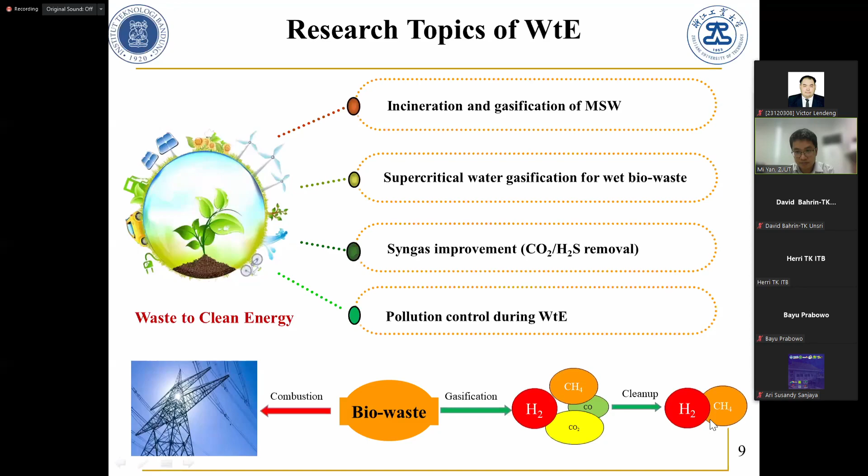So you can understand biomass or bio-waste, by gasification to raw syngas, clean up, get a high value syngas. So we have analyzed how the different materials, temperature, and additives affect the production of syngas. So this is our reactor. We can get 3 phases of products, including the syngas, char, and oil. From these figures, you can find CO2 is very high in the syngas, almost half or 30%. And also H2S and SO2 exist in the syngas.

So this is just combined with the industrial. So we have to capture CO2 from the syngas. In my research group, we have 2 methods. One is DES. Actually, this work is done by an Indonesian student. His name is Haloya Wibawa. So we produce syngas from SWG. Then we use the DES to capture CO2. We analyzed many factors, including the pressure, temperature, the water content. For my general conclusion for DES, the dynamics of absorption is very high, so it's very good for continuous absorption.

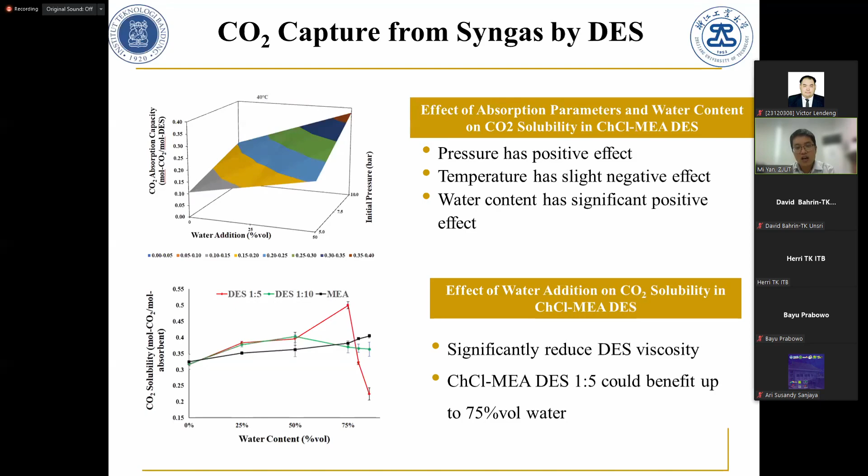And we also use MOF, Metal Organic Framework, to absorb the CO2 from the syngas. We use the CoBDC, and we also do some modification. We research the synthesis parameters, operation parameters, and we get the results, the influence of different factors. And we also do the H2S removal from the syngas. This work is done by an Indonesian student from ITB. His name is Dika. Maybe he has a longer name, but usually I call him Dika. The advantage of the technique is the absorber can work at high temperature for the syngas.

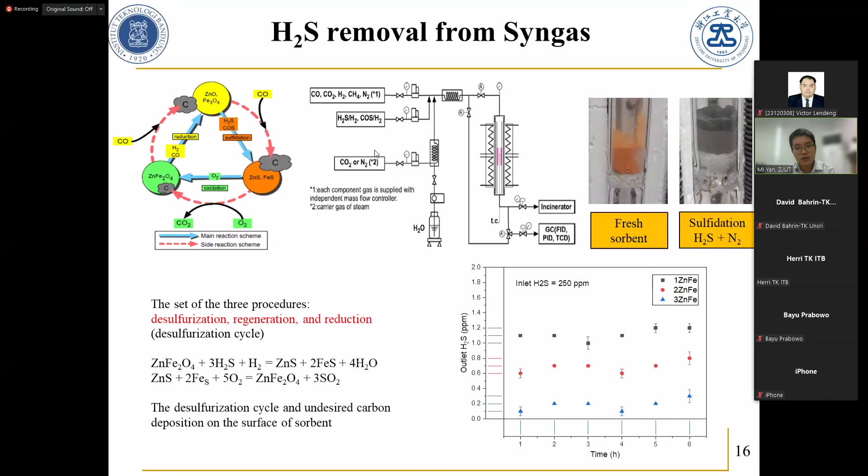As Professor Herri introduced, my lecture will have 7 times, today is the first time. So the title has been introduced, I will not repeat it again. So I just directly go to the content of today. Today I will introduce the 5 parts of my presentation. The first is waste generation, the challenge for living, for the environment, and the second is the waste to energy development and application in China. The third, I think all the public really concern the problem of not in my backyard, so I will share Chinese experience how to handle it. The fourth is the law system or the management for WTE development. The market of WTE not only depends on the technology, it also depends on the laws, standards, regulations. And the last one, I will share my personal idea of what's the challenge of waste to energy sustainable development for the developing countries and in China.

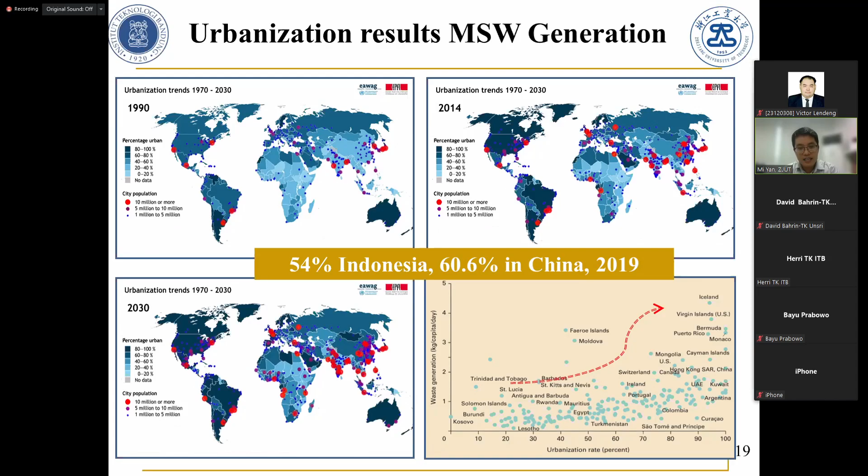So here we can see the society or the economy developed very well since the 1990s. The urbanization increases, right? So 1990s and 2030s, and we will have a sustainable development. But unfortunately, during the urbanization development, the waste generation per person also increased. As I get the information from the web, Indonesia is 54% urbanization and China is 60.6. But I believe we will keep developing in the coming years. So with the development, the municipal solid waste generation for the whole world is roughly 2 or 1.9 billion tons every year, with almost 30% not completely collected. Actually, if you look at the web, you can see it jumping.

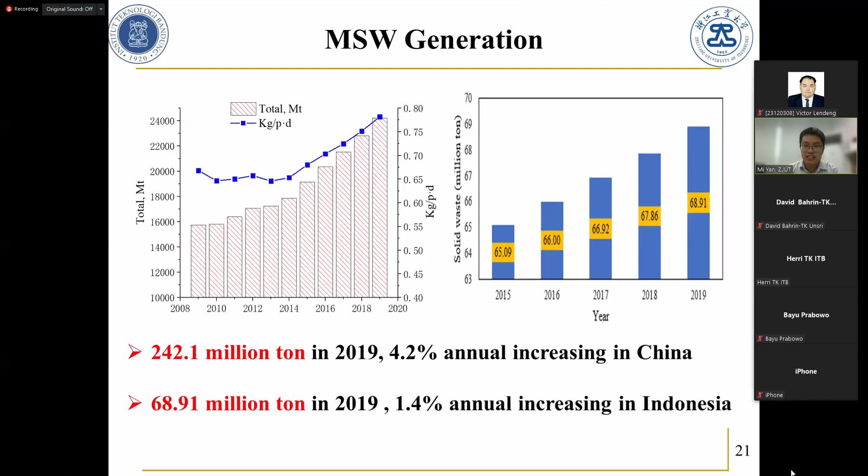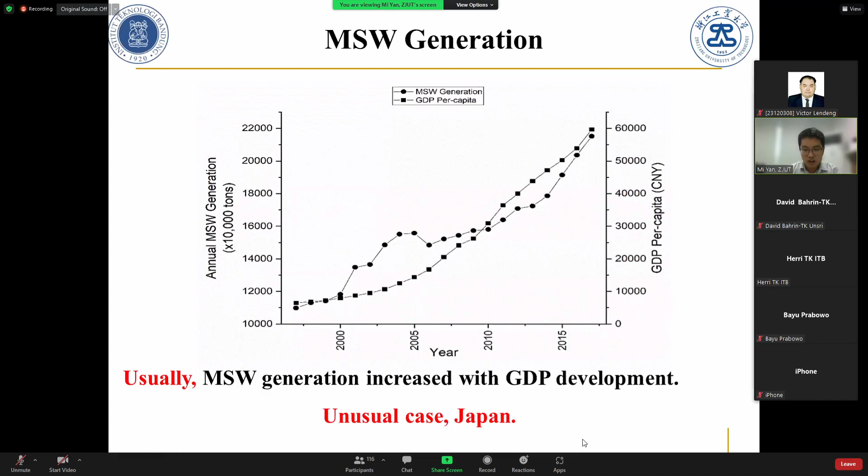For China and Indonesia, we can watch these figures. In both countries, the MSW, municipal solid waste, increases every year. In 2019, China produced 242.1 million tons, and Indonesia generated 68.91 million tons, and it is still increasing every year. So with this amount of MSW we have to think how to dispose of it. Actually, MSW usually increases with GDP development. The only unusual case I found is Japan: recently Japan's economy increased, but MSW decreased. I think we have to learn the Japanese style of how to reduce MSW generation. Usually we have to calculate the waste generation per person every day. Why is this data very important? Because in different countries the population is different, right? So we usually have to calculate this value.

This value also is very important for you to decide the MSW disposal facility. That means, usually, tell me the population of this city, and then I can calculate roughly how much MSW every year, every day. So I can set the capacity of the waste to energy plant. So this is very important.

From here, we can say the economy is good, the waste is more. And of course, China's case is like here. China is 0.78 kilogram per person per day, and Indonesia is 1.38. This is just for the citizens. Of course, in China, the eastern cities will be higher. In Hangzhou, usually we calculate 1 kilogram per person per day, but in Tibet, maybe it's lower.

And municipal solid waste is very complex in its compositions, and it also has rotten and toxic components, and varies with time and location. This is a challenge for disposal, right? So every city, every season, maybe is different. So we should think about how to treat and how to dispose of this changing waste.

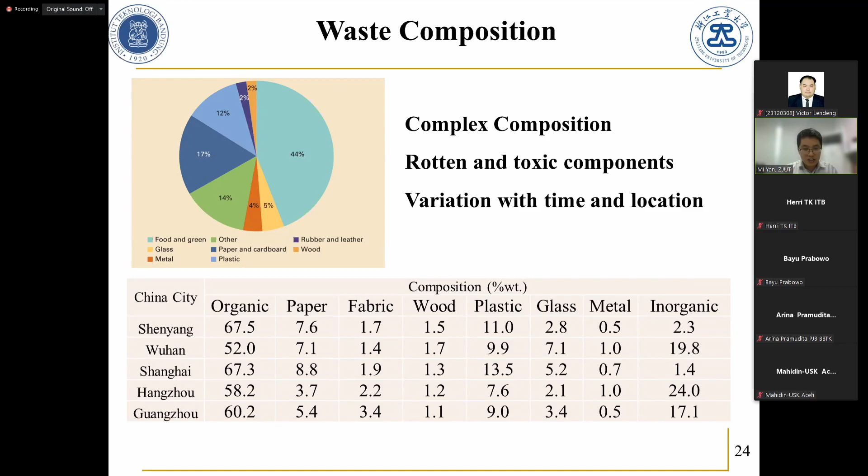Waste, I think everyone doesn't like it, right? It will occupy the land, will pollute the water, also your living environment. But the problem is the waste amount increases every year, and we have not enough land or resources to treat the waste. We cannot dump it, right? So how to deal with it, especially for developing countries?

So there are some definitions I want to explain. First is disposal. Disposal usually means the final disposal, like landfills. And recovery, we have different kinds. We can recover the material, such as gasification or carbonization, recovering the materials for the carbon. And we also can recover the energy. So waste to energy, we produce heat, we produce electricity. That also belongs to recovery.

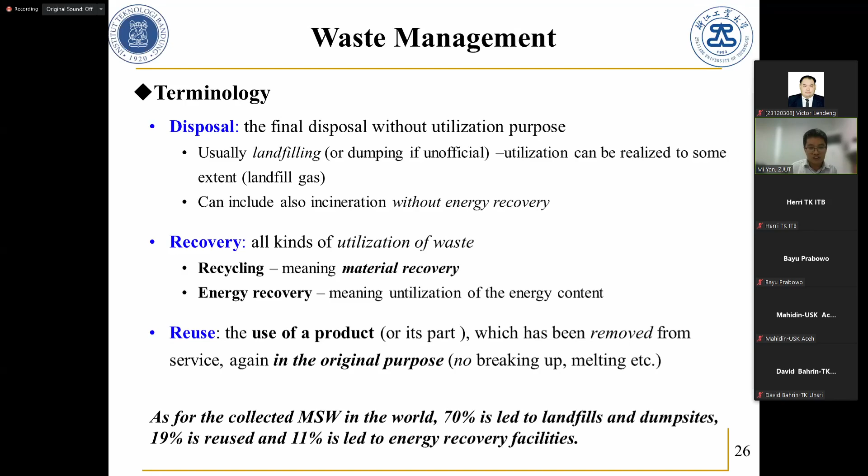The reuse of a product: maybe we just sell second-hand products, right? Usually your books, the senior students' books, can be sold to the freshman students. This is called reuse. So usually we should follow this: first we should try prevention, then reduce, reuse, recycling, then recovery. The last one is disposal, or maybe dumping. So yes, we should follow this.

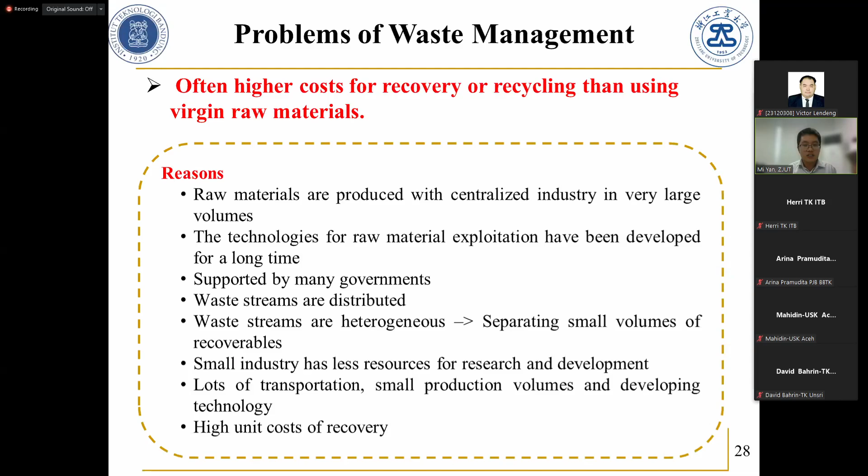But unfortunately, recycling usually has a high cost, even higher than new materials. That's why recycling cannot develop well in many countries, particularly in China. I have another slide about recycling, but maybe you read the news. China already banned the import of recycling waste from developed countries. Before 2016, China imported plastic and paper waste from the USA and Canada, but China banned it, and then this waste went to the Philippines or Southeast Asia. So recycling doesn't mean export or move.

So the main technologies for municipal solid waste disposal include landfill, composting, digestion, and waste to energy. But for municipal solid waste, usually it is landfill and waste to energy. I will explain later, because composting and digestion need land or produce smells. Composting especially is not suitable for the city; in China it's usually in village areas. Waste to energy can quickly reduce the mass and volume, and it can produce electricity.

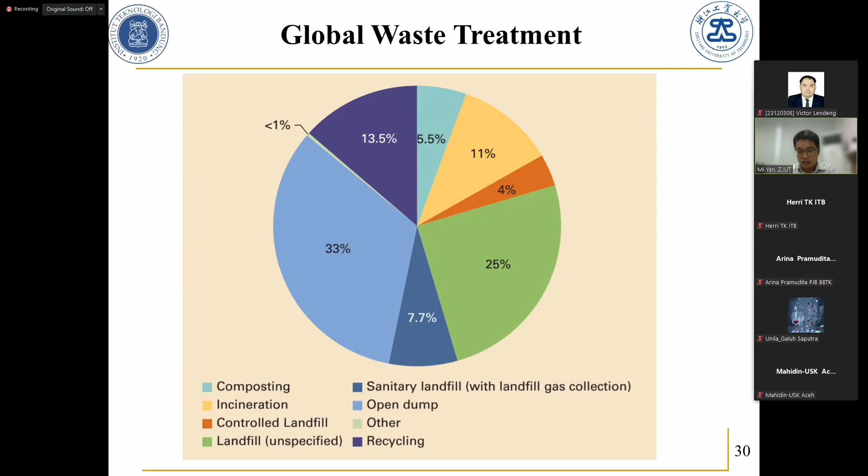For the world, this shows the different methods, including composting, incineration, and landfills. In developed countries, maybe they use composting for backyard waste, such as leaves. So about waste to energy development in China, I think this is the important part for all the participants. You will be interested in this.

As I mentioned, the main 3 disposal methods include composting, incineration, and landfills. But in China, since 2000, waste to energy developed very quickly. At the end of 2019, 99.2% of the MSW was treated, and half was treated by waste to energy. You can see here, the yellow one is WTE, the pink is landfill. So landfill is reduced, WTE increases, and others, mostly composting, are always very small.

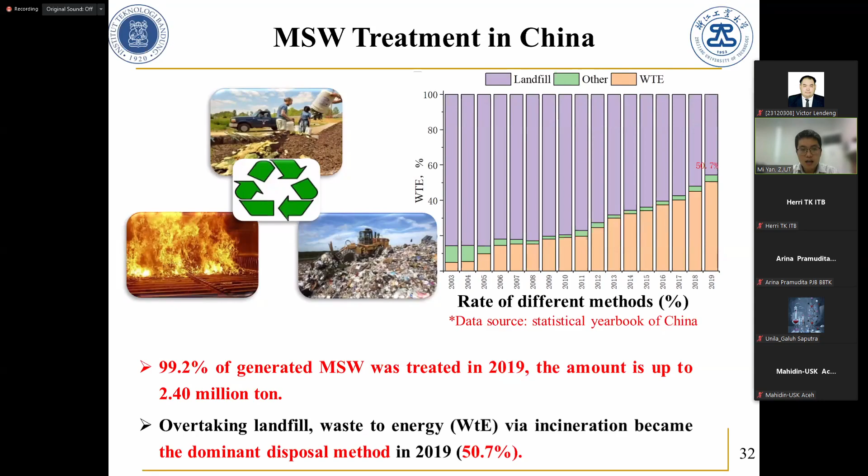Maybe GGH is not very common in developed countries. In China, it's very common. GGH is just how we can avoid the smoke being white. So later I will introduce it.

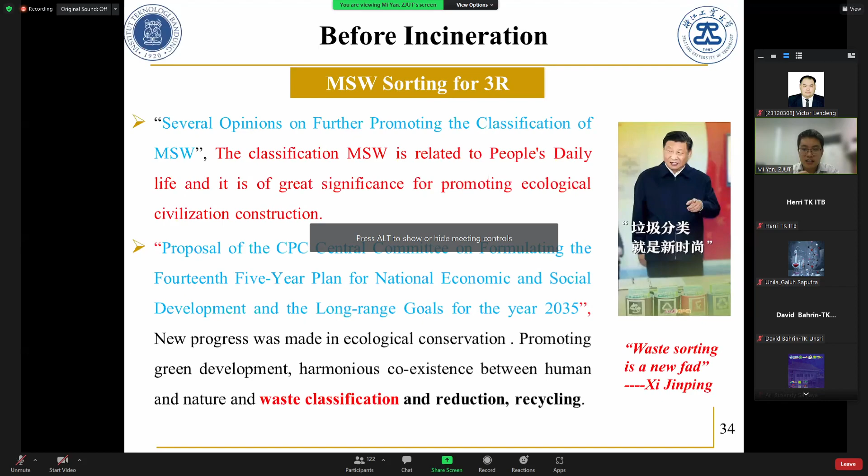Of course, in China, before incineration, we also hope to reduce the waste and recycle it. So MSW sorting activity now is very active. Even President Xi Jinping has given some orders, or talked about this topic many times. So we have some regulations for promoting sorting in China.

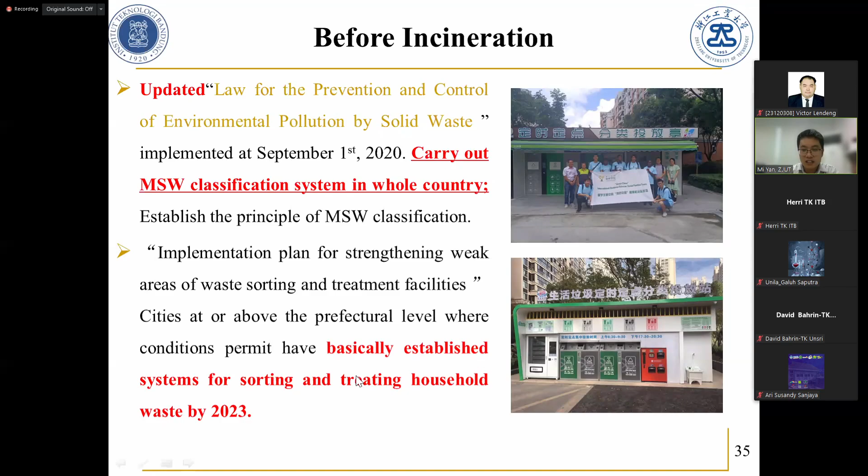So why does China apply waste to energy so quickly? There are some reasons. In my opinion, it can quickly reduce mass and volume. It can completely treat waste with less land occupied, especially in the east part. China has huge populations, so we have to save land, and it produces electricity and construction materials for the city, because the slag, we call it bottom ash, can be used for roads and for buildings.

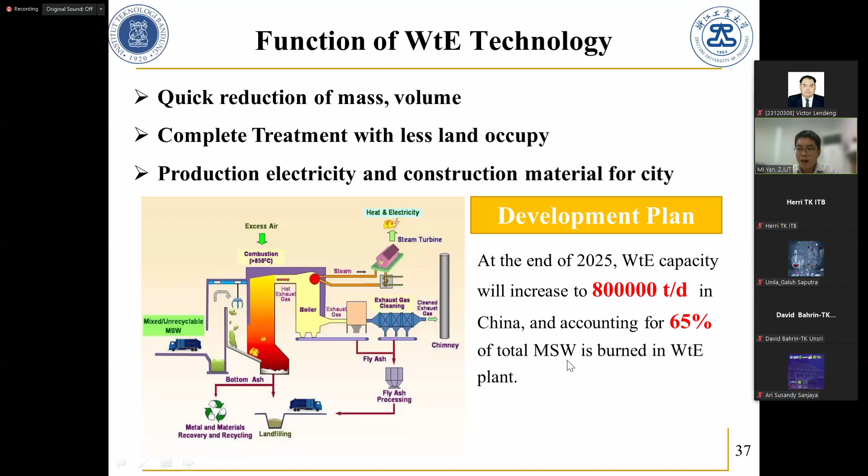Another is that waste to energy also reduces CO2 emissions. I have to explain why waste to energy reduces CO2. Maybe you will think it emits CO2, right, but there are two main reasons. First, if we do not burn waste for energy, it will go to landfill. If it goes to landfill, it will emit methane, and the effect of 1 mole of CH4 is 24 times that of 1 mole of CO2. So first, we can reduce methane emission from the landfill.

The second is, if we do not burn the waste for electricity, we have to burn fossil fuel, such as coal, right? So we can reduce the methane emission from the landfill, and we can reduce coal consumption or coal combustion. So we call it the green carbon of waste to energy.

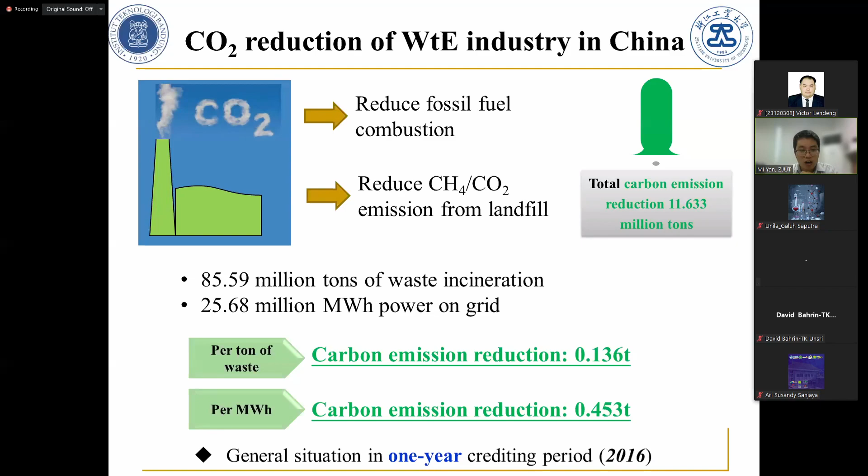Another is the capacity. As I showed you, the capacity is 456,000 tons per day in China, right? But actually, the capacity does not mean how much waste can be burned, because during operation we have to maintain it. We have to repair some parts, and even some accidents will happen. Some problems will happen, so we have to spend some time on maintenance. So the real capacity is not equal to the installed capacity.

So I calculated the capacity ratios. In China, the capacity ratio is roughly 0.73, and the operation hours are 6,400 hours per year. Usually, technically, we say the reasonable operation time is 8,000 hours per year. That means we spend 1 month on maintenance. So the calculated capacity ratio of WTE plants is 0.8 in China in 2019.

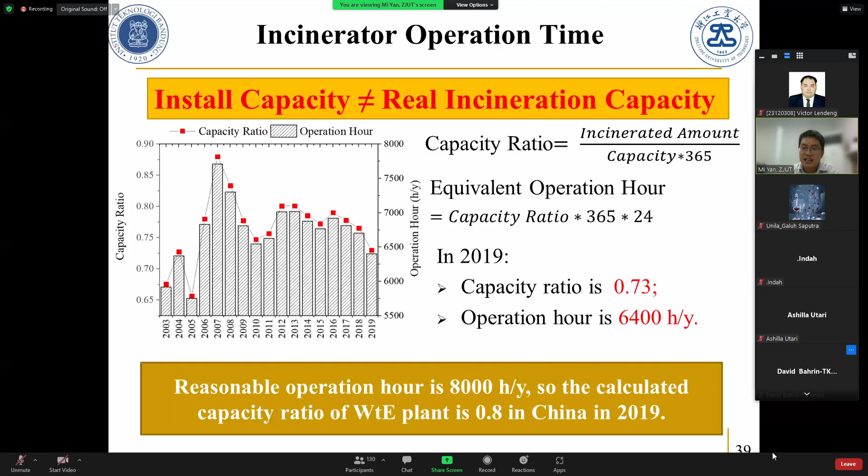But that doesn't mean all the electricity produced from waste incineration can be supplied to the market. Roughly 15% is used in the plant itself. Installed generator capacity is roughly 12 to 15 megawatts for a 500 ton per day WTE. I will mention why we calculate as 500 ton per day WTE. Usually one incinerator's capacity is 500, or 750, or 800. So usually one plant has 2 incinerators, 500 plus 500.

So here are the typical 2 kinds of incinerator furnace. One we call the grate. The other is the circulating fluidized bed, or we just call it CFB. You can see here the flue gas system is the same for both kinds of incinerators. We have the scrubber, the bag filter or baghouse, the SCR, or we use activated carbon. The only difference is the furnace. This is the grate, this is the CFB. The MSW will go up, and the recycle comes back again. And of course, the turbine is the same.

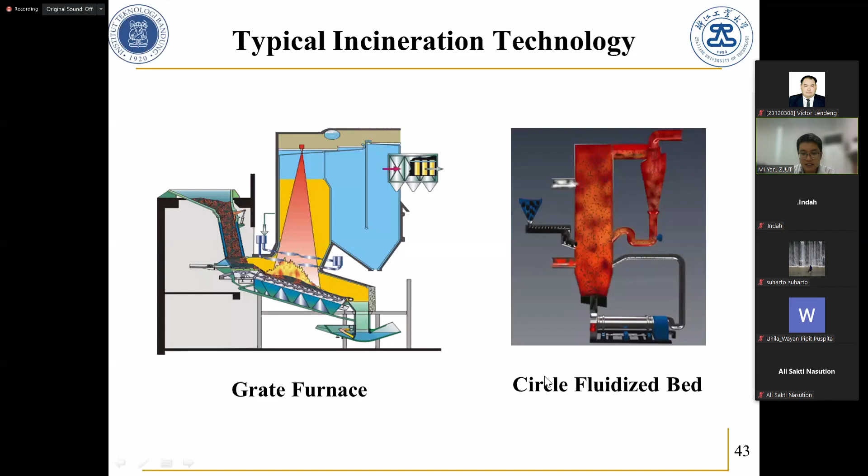And this is the CFB. The particles or the MSW will be suspended by the air from the bottom. So the waste comes here, then feeds into the boiler or CFB, then goes up. This is the cyclone. Between the grate and the CFB, only CFB has the cyclone, and another difference is the requirement for feeding. For the grate, raw MSW is okay. But for the CFB, we have to shred it into small parts. But CFB also has some advantages. It is suited for wide variation in the heat value of the feed.

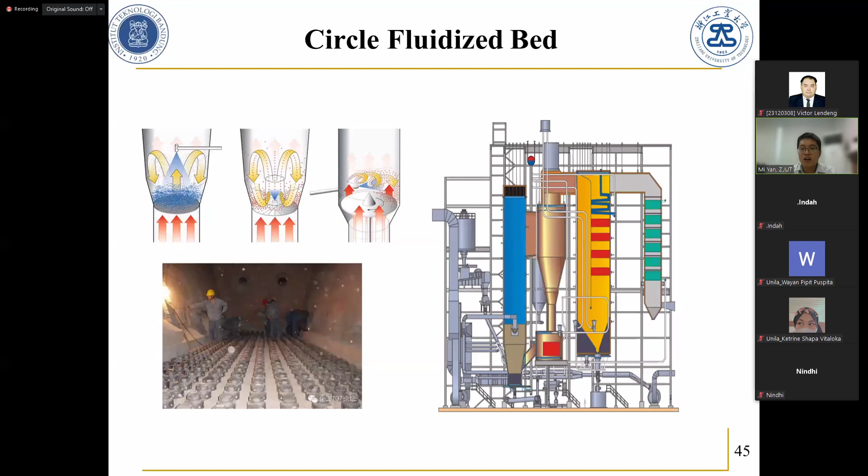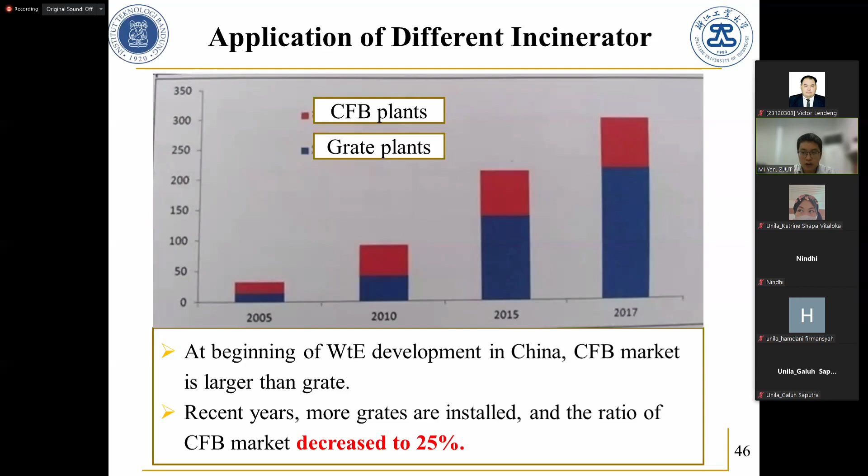So this is the application of different kinds of incinerator in China, CFB and grate. At the beginning of the WTE industry in China, the CFB occupied the main market, more than the grate. The reason is CFB was developed by China with domestic technology, so the cost is lower, but the grate is more expensive. So at the beginning, the market chose the CFB, but now more and more grate is applied in China because the grate incinerator can also be designed and built by Chinese companies. So the price decreased, and it gets more market share.

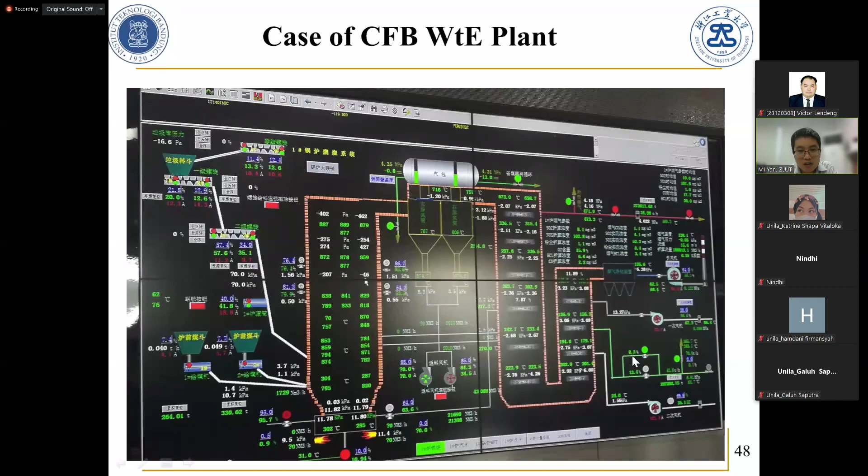For the CFB, we can mix coal together with MSW, but for the grate, we only use gasoline to help the combustion when the MSW is not stable or the quality is lower. So you also can see the emission data, most of them is less than 10. So it's fairly good operation.

And about other countries' WTE development, you also can get the information from our report of waste to energy in selected regions of the world, including China, Malaysia, Indonesia. Actually, he is co-author, with me and Professor Harry. So his name is here. So you can download from www.iccwt.org. This website is organized by me and by my supervisor.

So the third part will introduce China's experience, how to deal with not in my backyard. So in Chinese experience, I conclude we have 5 points. The first is we can increase investment and build modern designed buildings to make the plant's outlook beautiful. And we upgrade the laws and standards for emission to limit the pollution and explosion risk. And we develop advanced pollution control technology. So in the future lecture, I will introduce the pollution control technology and equipment. Of course, we do the public education.

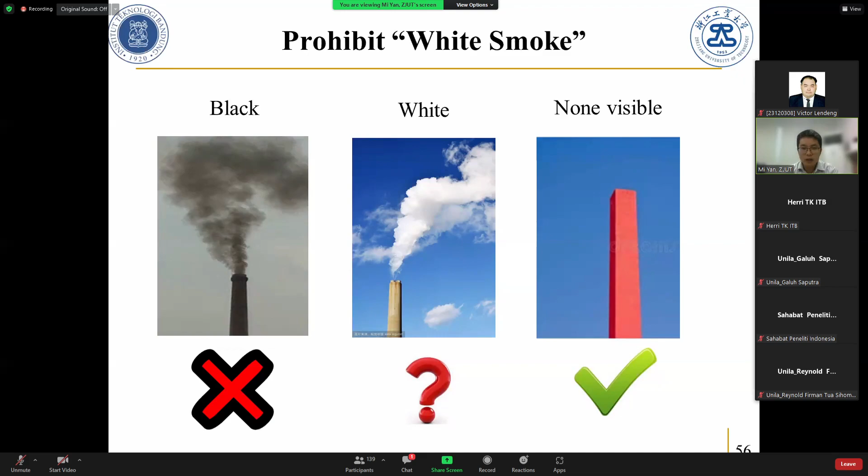So now we are still trying to educate the public. White smoke is no problem. Black is a problem, right?

So this is a typical WTE plant in Zhuhai: the visitor reception hall, the control room, the tour passage, and the cleaning. They feed the waste by these operators - the tipping hall and the flue gas clean system, turbine generator, and some basketball court or living facilities for the staff.

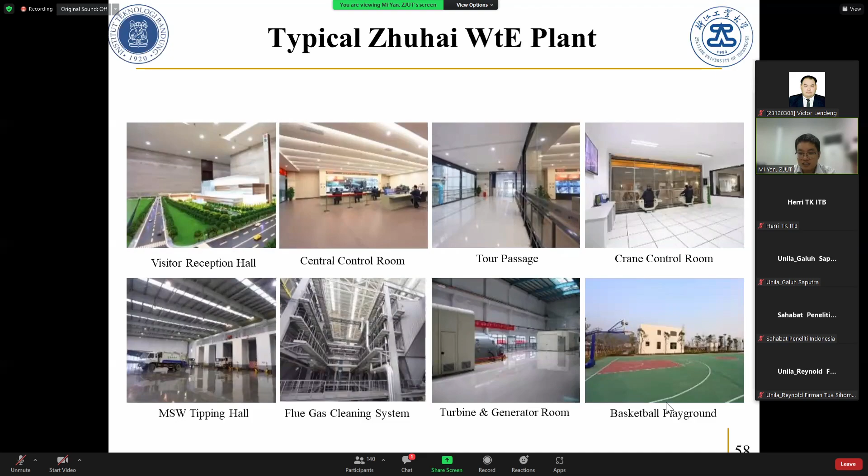So here I want to show you 2 cases of waste to energy plants through internet sites, so you'll believe what I said is the truth.

Okay, hold on. Can you watch my web, Professor Herri? Yes, I can see.

Clear, okay. So this one is from a helicopter - just take a photo. So this is the waste to energy plant, you can watch around. It's in a valley, close to some villages, and this is another plant.

This is a food waste treatment plant for fermentation, for biogas. This is a storage of biogas. You see here, then we go to...

So you can see this is the crane control rooms, with 2 staff. This is the waste, municipal solid waste, and this place is the feeding hopper, so they use the crane to catch the waste and feed it here.

So this is the tipping hall, the receptor for the waste. The truck drops the waste into the tipping hall - you can see it from the door, right?

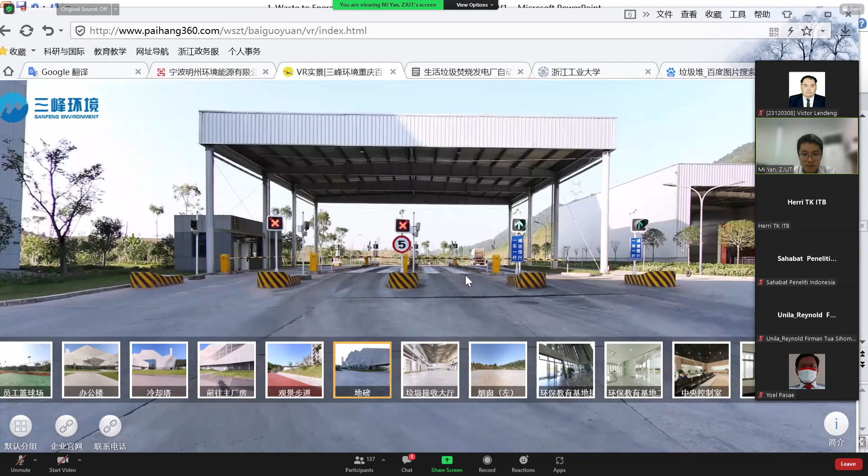Okay, let's go to the website. So all the waste and the plant will have the weight - how much tonnage totally every day, we'll calculate. Then the truck comes. Oh yeah, so this is the gate, they just drop the MSW at the tipping halls.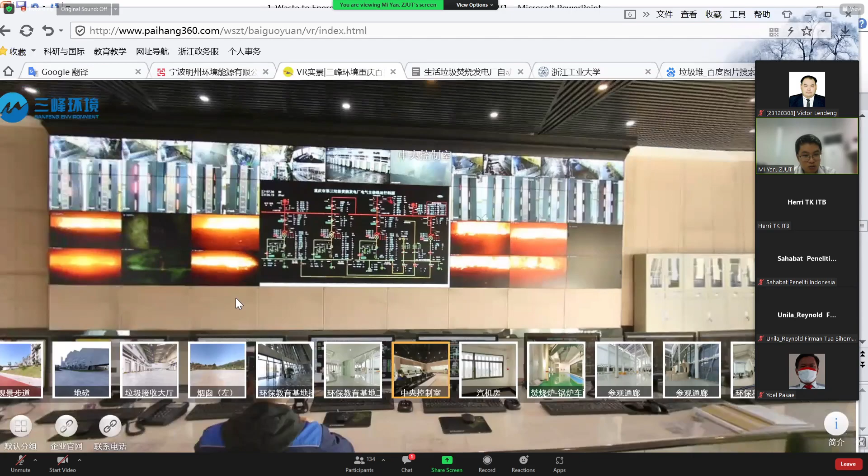So let me go to the central control room for the staff. This guy is in charge of the steam turbine, another is in charge of the incinerators, and another maybe for the flue gas cleaning system.

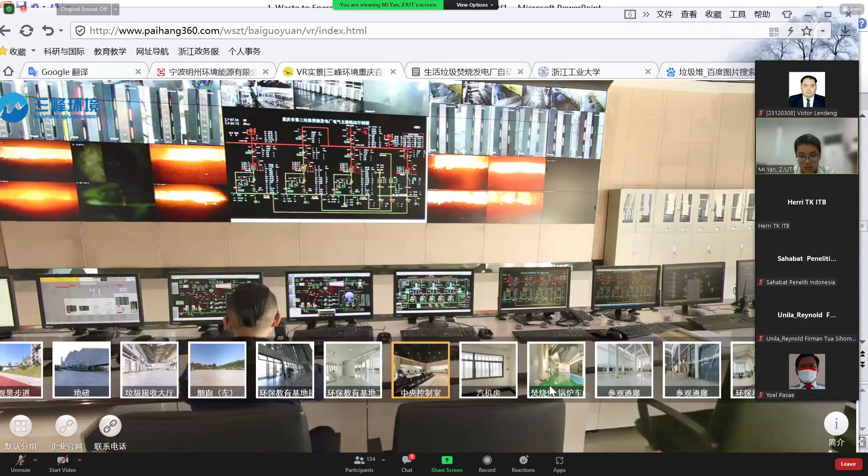Let's see the equipment. So this is the steam turbine, 3 sets. Oh, where? Excuse me, wait, hold on. Okay, I'll just go to the equipment.

Okay, maybe education, so here is the education room for the visitors. And this is the boiler, incinerator. You can see here, yeah, it's very clean and very tall. You can see this green part is for workers, and this part we cannot touch because it's equipment.

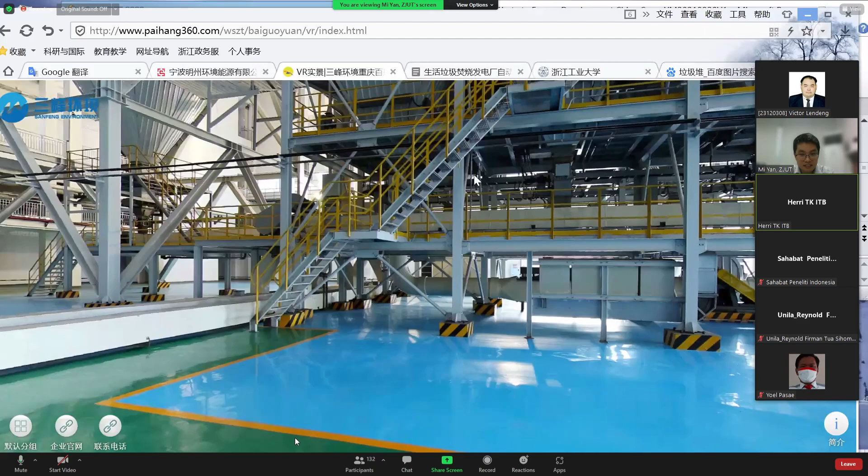First of all, nice to meet you, Dr. Mi Yan, thank you for your presentation. My name is Victor Lendeng, I'm from mechanical engineering, ITB. My question for you is, how do you determine or sort which MSW to be used as WTE? What are the considerations for choosing the composition of MSW that are burned?

Okay, so actually all the municipal solid waste produced in the city, we collect all, mixed together. So we just use the raw MSW. I'm not sure, here are some pictures. Wait a moment, excuse me.

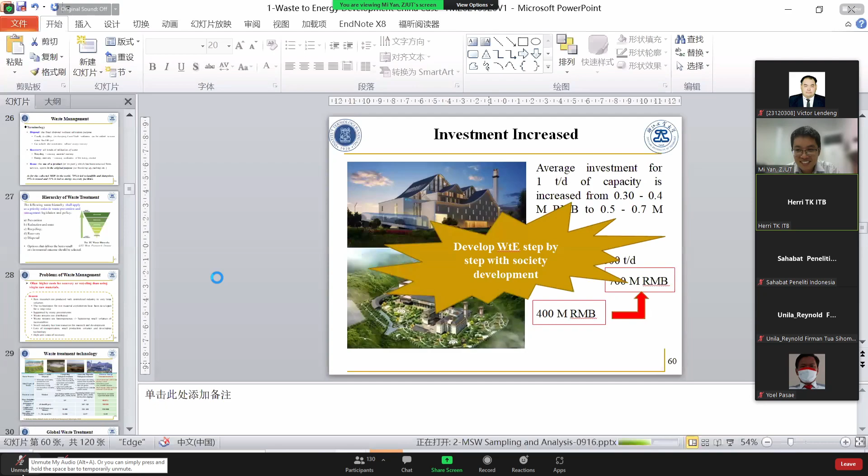Oh, I can use another PPT to show, because actually in the next class I will show the sampling of MSW. Okay, no problem, I'll just show the picture. That means all of the MSW is put into the boiler, something like that. Yeah, just like this.

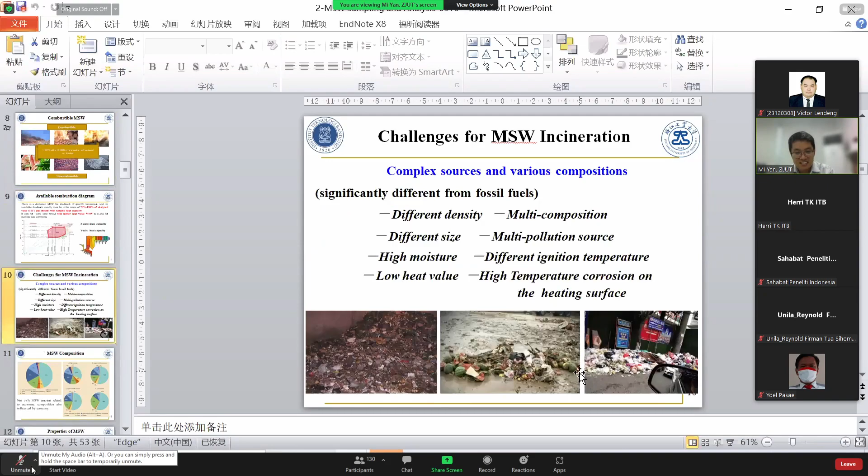But before, what you produce, what you collect, we burn it. But usually at the beginning, maybe 20 years ago or some 10 years ago, the heat value was not enough, so we would mix some coal together with the MSW, less than 10%. But now it's not necessary. We figured out a method: we can store the raw MSW in the tipping hall for 7 days, so the moisture reduces itself and the heat value increases. So anyway, we just burn what is produced, what we collect from the city. So it doesn't matter where or when, whole year, whole China, we burn it.

We will, before design, do sampling and analysis, so we will design the incinerator accordingly. So this is the case, that's why I show you this. Before designing and manufacturing the incinerator for one city, we have to sample and analyze the character of the local MSW, not just the amount. So we know how much heat value is in the city, then what's the capacity and composition needed, then we can design it and it will work.

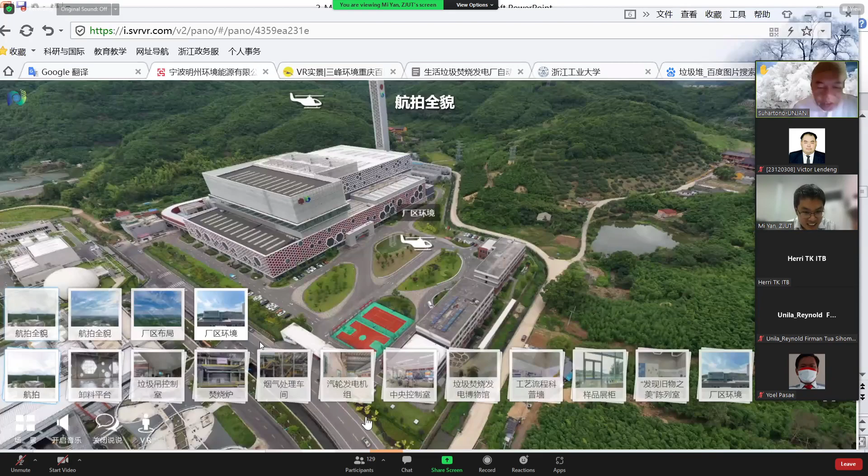Pak Suhartono, yes please, Pak Suhartono. Okay, thank you very much, Prof. Herri. My name is Suhartono from Jenderal Ahmad Yani University. I was a doctorate student of Professor Herri Susanto.

At present time, my research is concerned with converting solid plastic waste into pyrolysis liquid oils as a main product of pyrolysis. And this pyrolysis oil can be used as a fuel for household and small industry in my country.

Okay, thank you for your question. I'm glad you are here. So for pyrolysis, we can say it's a very good technology, but it's not a mature technology. That means it cannot be applied at huge scale in the industry, maybe small, 50 tons per day, 100 tons per day. The maximum in China for gasification and pyrolysis is about 100 tons per day, and the operation is not stable. The product is not very well accepted by the industry.

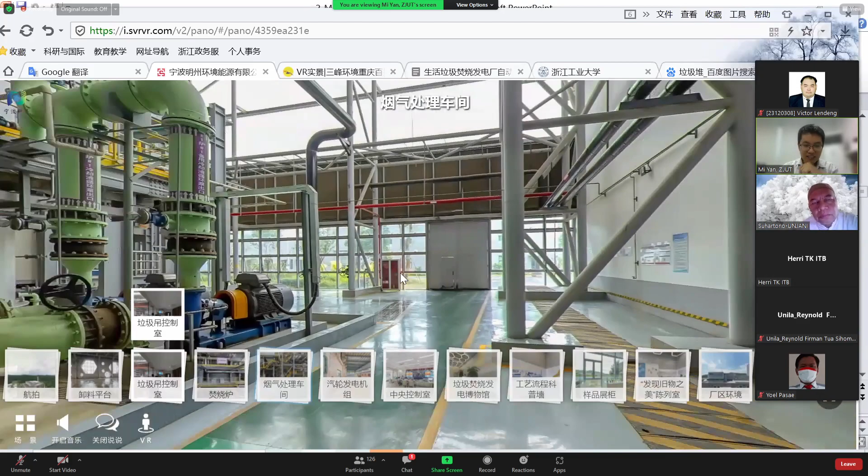So now we also do some research, such as combining plastic or other homogeneous feedstock with a coal power plant. We gasify or pyrolyze first, then the oil or gas, the syngas, is injected into the coal boiler. Because we just burn it, it's okay, and you can accept changes in your feedstock, the oil. But if you want to use that oil for cars or some machines, no, we still need more technology, more development. Yes, this is my answer to you.

Hope I understand your question. Okay, thank you. Yeah, maybe I want to add. Yeah, you see here, I think the question from Victor.

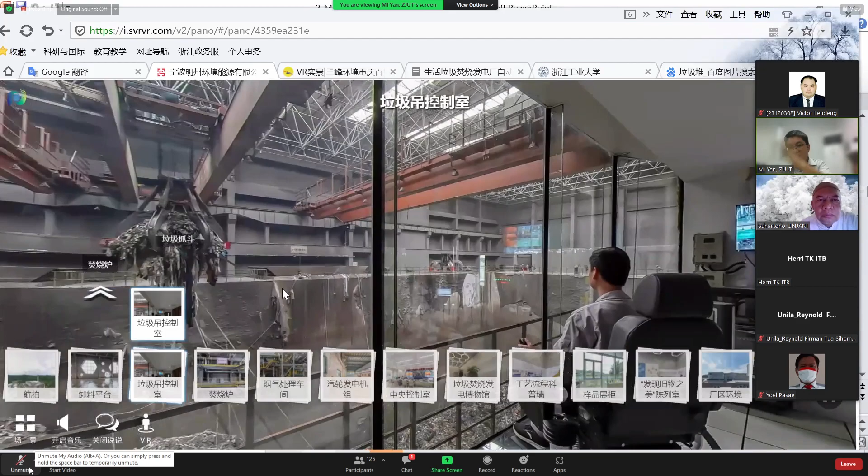You see, this is the real waste, just what's produced and collected from the city. Then we store it here 7 to 10 days. That means today's waste coming in, we don't burn it, we burn waste from 7 days ago. The waste will ferment in the tipping hall, it will dewater itself, from 60% to 40% moisture content. So it will be dried and the heat value quality will increase. The second thing is the tipping hall is vacuum, meaning the smell will not go out. We use a pump to suck air from the tipping hall, then inject it into the incinerator. We burn using the air from the tipping hall as the primary air. So this is the technology to avoid the smell.

So this I want to add to the first question. Thank you, thank you, yeah thank you. Thank you, go on Dr. Mi Yan, with the next material. Okay, I will give time again for question and answer, I should go back. My PPT, is it not this one?

Oh this one, yes. So I have to mention that I also showed you the plant 15 years ago, right? And now, so 15 years ago it was a factory, right, as you know. But now we call it, how to say, like an industrial park, with a beautiful outlook, right? But actually all the improvements we need to invest, we need money.

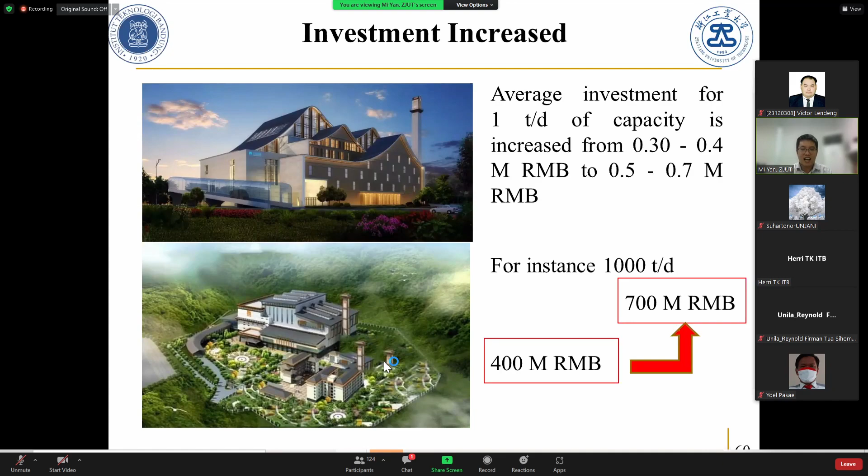So the investment for the waste to energy plant has already increased significantly. For 1 ton, from 0.3 to 0.5 or 0.7, that means double. And this is a typical case, 1,000 tons per day, from 400 million RMB to 700 million RMB. So outside it looks beautiful, everything becomes better, right? But this needs investment. So I want to say, yes, how to say, we develop WTE step by step with society's development.

And we also upgrade the laws, the regulations, the standards. So we frequently upgrade our law standards. So if you seriously pollute the environment, the boss, the manager will be put in jail. So they will take care, thinking of the cost to the environment.

We have a joke for the boss, for the investor. Money is a small problem. So they punish you 1 million, 2 million. Okay, I pay, I can earn it back, right? But if they put you in jail, when 1 year later, or some years later, you come out, your wife has become another man's wife. Your children become another man's children. So they will take care. A fine cannot resolve the problem. If they put you in jail, okay, they have to be concerned. So this is very serious.

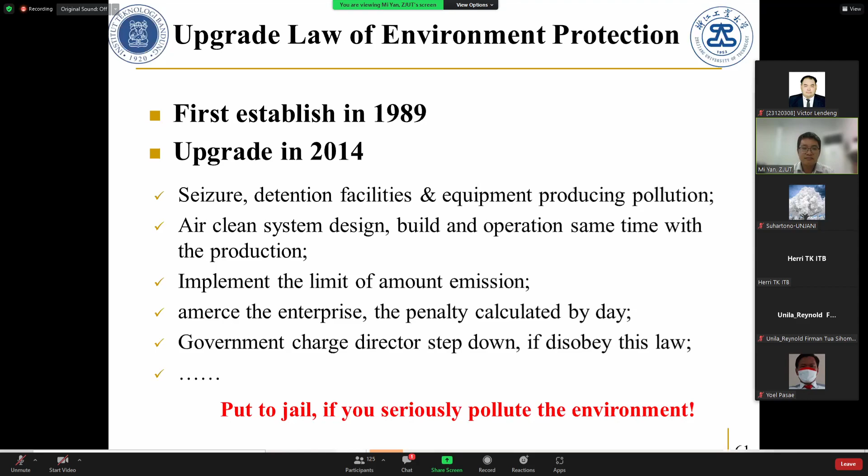So we also upgrade our emission standard. So it was first established in 2000, but up to 2014, we already have the third edition. So these are the limits. So here I also want to explain 1 hour, 24 hours. So usually the value fluctuates, right? But it is no problem. So you just calculate the 24 hours.

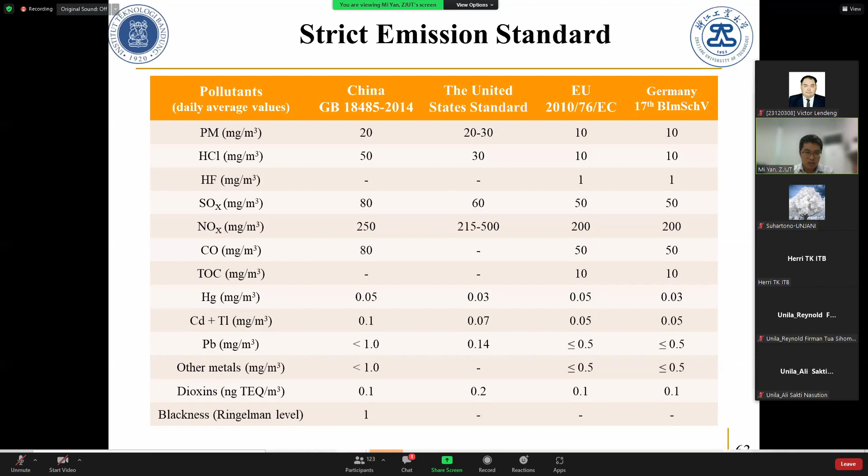So we can compare with the developed countries. Some values are lower, some are higher. Such as dioxin is 0.1 nanogram TEQ per cubic meter, but for HCl and particulate matter, we are still higher. I have to say, a stricter emission standard means higher cost, because we have to inject more active carbon. We have a larger baghouse, right? So this is related to the cost, and we apply well-developed equipment to reduce the emissions.

So I made a survey of 313 WTE plants in 2018. 98.1% of plants installed semi-dry scrubber, active carbon spray, and baghouse. The semi-dry scrubber is for acid gas capture, such as SO2, HCl, right? Semi-dry means you inject slurry, but the output is ash. Also, 69.4% of plants installed SNCR, meaning selective non-catalytic reduction. And at least 13 plants installed SCR.

Actually, NOx for WTE plants is not a big problem because the temperature is lower compared to a coal power plant. So the NOx emission is okay. The key is dioxins. I will go into the detail when I give the course. I think it is 6, right? Dioxin emission and controls.

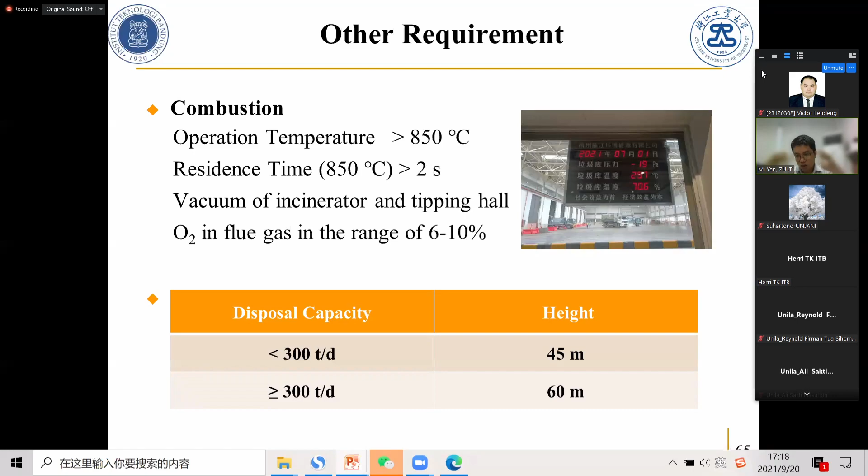And another is all the emission data is open to the public. We call it install, connect, and open. So here the real-time emission data is shown on the monitor installed at the gate of the WTE plant. So this board shows the emission data in real time. Maybe every few seconds it will update. So all the emission data is open to the public. This board and this board. So this is the gate of the WTE, and this is the chimney. This is in Hangzhou, and this is in Ningbo, both in our province.

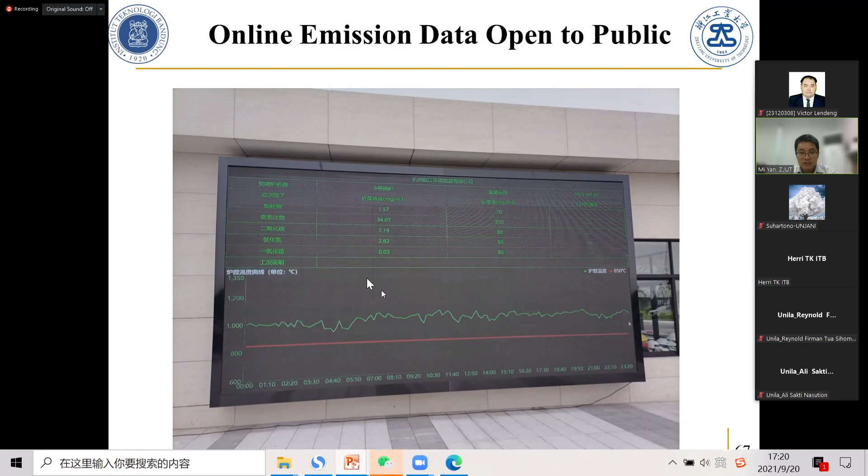And this is the board detail. I'll show you what information is shown here. So this is particulate matter, NOx, SO2, HCl, CO. So this is the real data, and this is the standard limit, and this is the temperature. So 850 is the standard limit. So higher than 850, roughly 1,000, shown here. This is in Hangzhou.

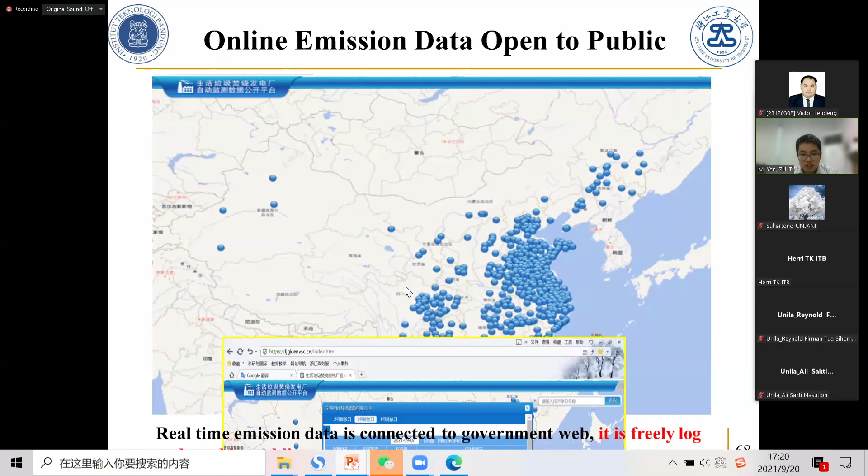So also, all the data is not only shown on the board installed at the gate. All the data is connected to the government, and the government opens it to the public by website. So you see, this is the China map. One blue circle means one plant. There are already over 580 WTE plants in China. So if you click the circle, you can get the information, the emission data, and the temperature. So let me show you the real case. So, Professor, can you guys see my web page, right?

So you see from the web, you can know the capacity: 750 tons per day, one line. So they have four lines. That means the total capacity is 3,000 tons per day. Then we go to, okay, wait. Wait, what happened? Okay, oh, here. Oh, sorry. Excuse me. Okay, here.

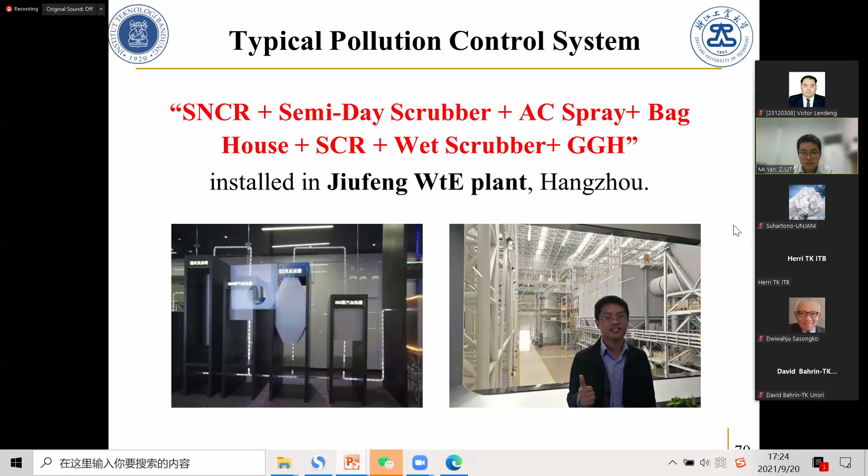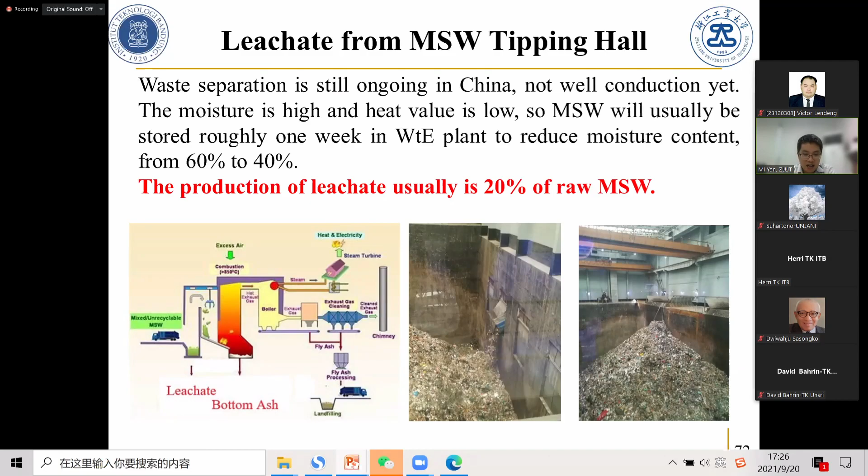And of course, we also take care of the leachate from MSW, because we store it 7 days or 10 days before the incinerator. So we'll produce roughly 20% of the raw MSW as leachate, right? So we have to take care of the leachate. So this is leachate. Black means dirty, right? We also have the data. COD and BOD are very, very high. It's not easy to treat it, so we need more complex systems. So let me show you.

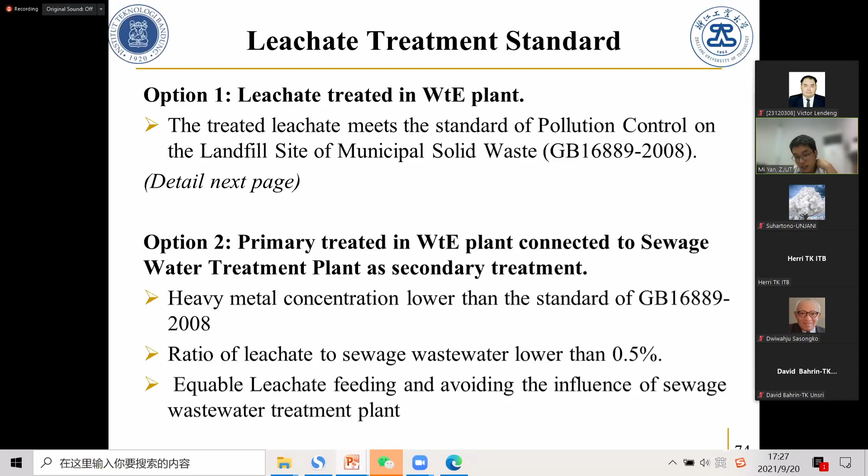For the leachate treatment standard we have two methods, so two standards. The first is leachate treated in the WTE plant itself. Then they can reuse the water for production, such as for grassland, for the semi-dry, for the fly ash treatment. Also, primarily treated, just simply treated in the WTE plant, then connected to the sewage treatment plant. They just use a pipe to another wastewater plant to treat it. But of course, we have a specific standard for the leachate. So here is some data.

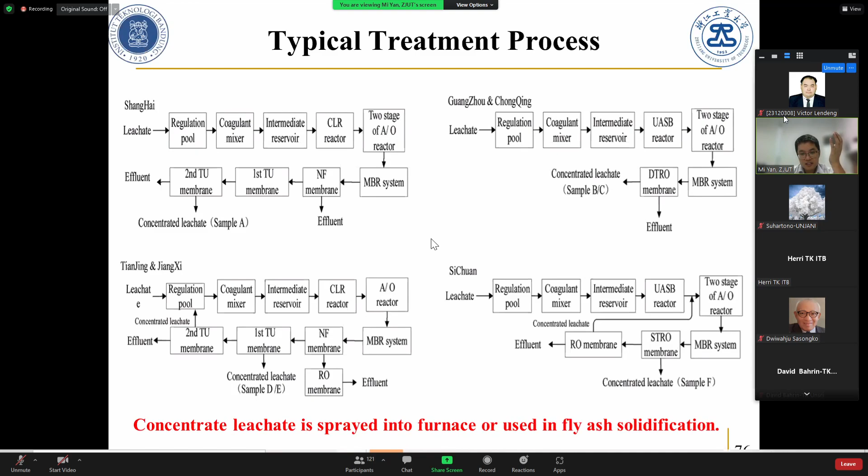And we also have some typical treatment processes. I should move this one. So here we have 4 kinds, but all of them, if they use membranes, will produce concentrated leachate. This is much more difficult to treat compared to the raw leachate. So usually it will be sprayed into the furnace or used in fly ash solidification. The concentrated leachate is produced from the membranes. So this is one case.

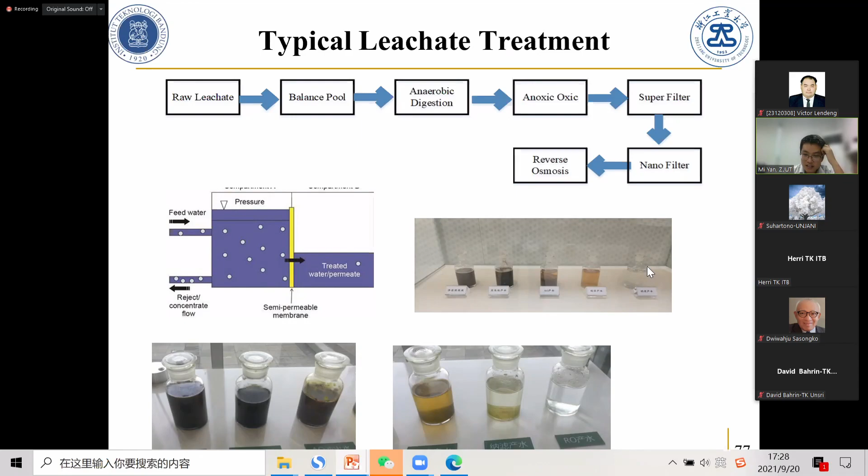The raw leachate, the balance pool, the digester, the oxidation, ultrafilter, nanofilter, and the RO is also a filter. So this is the raw leachate, and this is the output of the wastewater treatment. And we also frequently use the MBR, the membrane biological reactor. So this is raw leachate, this is the treated water, and this is the equipment.

Of course, from my experience, the operator is very important. So can I move this one? Otherwise.

So the operator is the key role for economic profit and pollution control. Training for operators and managers is essential. So you should frequently, every half year or every season, test your operators, your staff. And now our master's and PhD graduate students have also started to work in WTE companies because the benefits are good, the salary is good. So it has already started, but not many.

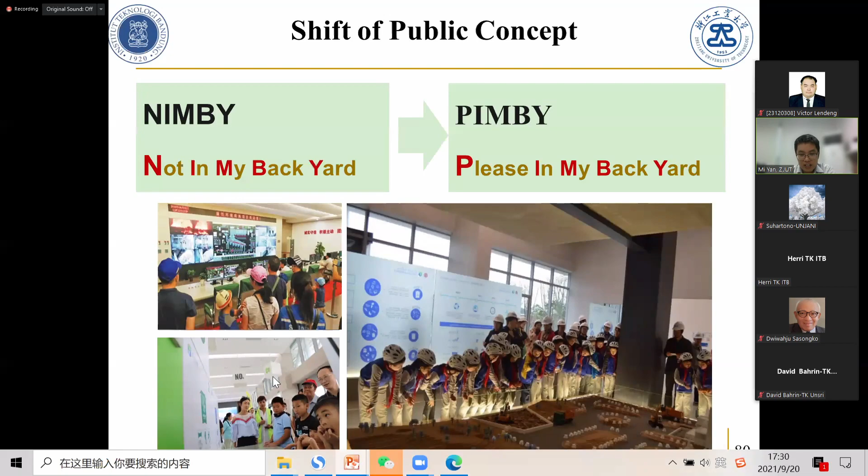Okay, so now "not in my backyard" is gradually becoming "please in my backyard." Many children's education activities are done in the WTE plant, and this is a demo, a case we call the no-fence WTE plant. You see here, this is the waste-to-energy plant. This is the chimney. Also, this belongs to the plant. So no fence.

The citizens can enter this area freely. The WTE plant set up some public room areas for reading, for coffee and for children. And it's very close to the shopping mall, the supermarket for households. So it will get along with the citizens. So this is a Chinese case.

Of course, I would like to introduce the system for WTE development in China. If we want to develop the WTE market, it's not only technical, not only the investment, we also need laws and management. So in China, we have a very comprehensive system for WTE development. The key point is that construction and monitoring are separated. The Ministry of Ecology and Environment just concerns itself with your emissions, they just monitor your situation, and the construction responsibility belongs to the Ministry of Construction.

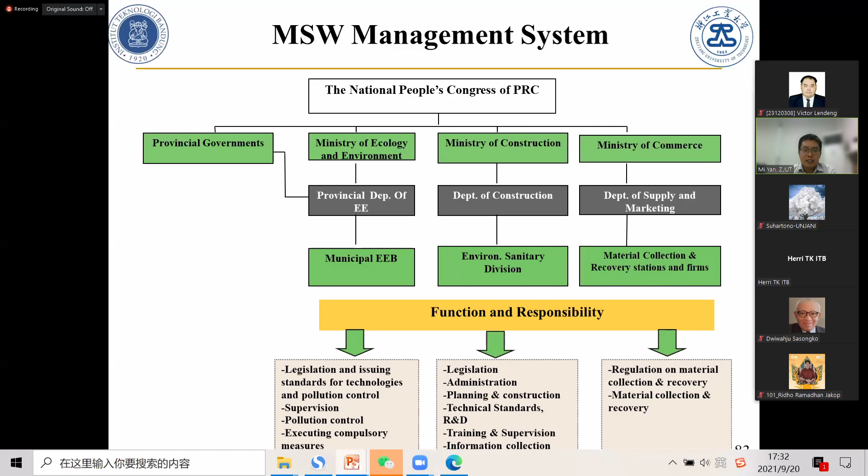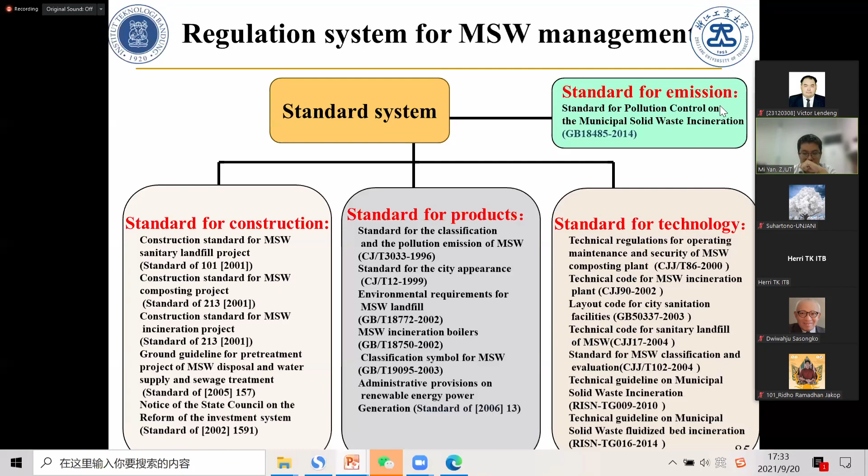So we have several layers: law, code, standard, and policies. For standards, we have standards for construction, standards for products, standards for technology, many details. We also have standards for emissions. So this is emission. And we are also very concerned with online emission monitoring. All the plants have to install online monitoring equipment, online measurement, and all the data is open to the public.

You can see here some statistics. In 2020, only 83 complaints, not protests, just maybe some citizens calling the government saying the emissions or the smell is not good around the WTE plant, were filed against municipal solid waste incineration projects, down 49.1% from 2019 and 80.9% from 2018. So that means more people already get along with WTE plants, there is no smell, so the public accepts them.

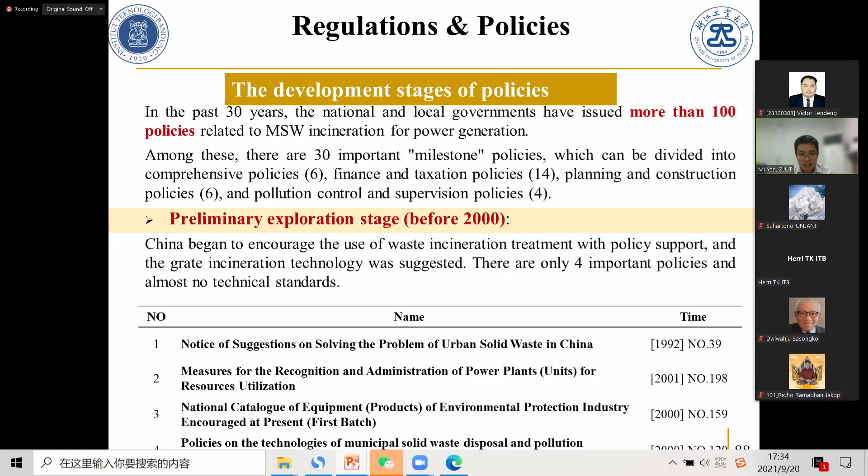And we have some stages of policy development. In the beginning, the government did not pay attention to the WTE industry, because there were very few WTE plants. They just gave some promotion or some suggestions. So this is the primary stage. After 2001, maybe the government realized if we want to develop the city and attract investment from developed countries, we have to build clean cities. So the government more strongly supported WTE plants.

But after 2011, the real estate, the housing market, increased, the prices increased. The citizens were afraid WTE construction would influence the price of their houses. So there were many protests, many complaints. So the government started to monitor and set more strict standards for WTE plants.

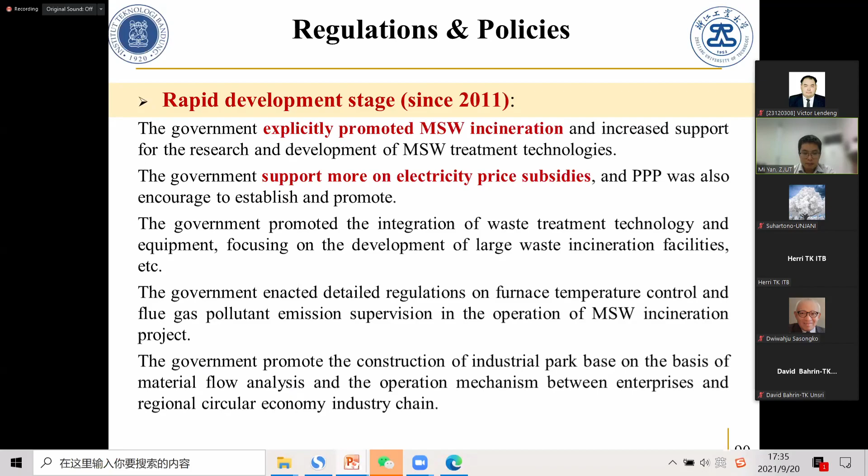And by the end of 2030, there will be 13 extra new WTE plants with a capacity of 9,350 tons per day compared to the 2019 situation. Actually, in our province, Zhejiang province, my hometown, there has already been zero landfill since May 2021, this year. That means all the waste is burned in incinerators.

But why do we still plan to build more waste-to-energy plants? Two reasons. The first is because the MSW still increases every year, right? So we have to build more WTE plants and set more capacity for the increased MSW. The second is to build new facilities in some small cities, as their MSW is transported to a neighboring city at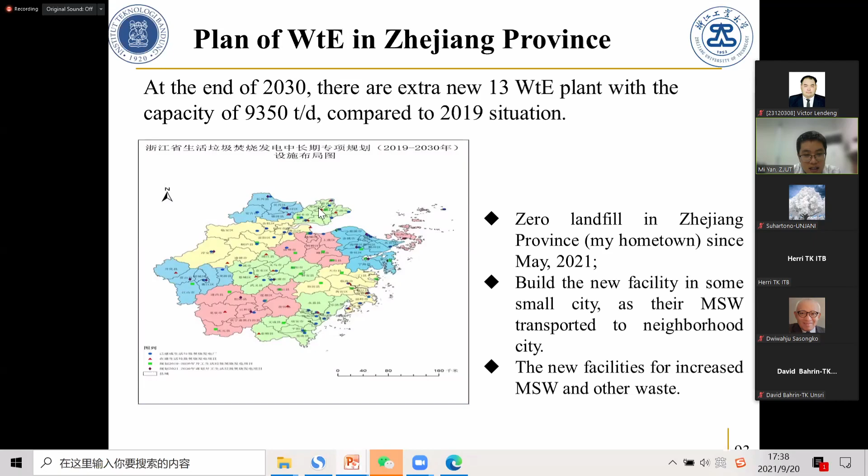present. For example, small city A will transport their MSW to city B, then A should pay for the service to city B. So now every city hopes to have their own WTE plant. So maybe some small cities started to build the new facilities, as I already mentioned. The blue ones are in operation. The pink are under construction. The green ones are planned, and every location is already planned in great detail.

And now I want to share the profit, the business models. The business model in China includes two parts: a basic price for the tipping fee, plus the subsidy. Energy from waste is considered renewable energy, so it can get the subsidy. The tipping fee is based on the contract with the government, in the range of 50 to 250 RMB per ton.

Like in Hangzhou, roughly 114 RMB per ton. In some small cities, only 80 RMB per ton. In Shanghai and Beijing, over 200 RMB per ton, depending on the cost of labor and the cost of the construction. In different cities, the cost is different. The subsidy on the electricity is like this.

Basic price of 0.4 RMB per kilowatt hour. This is for coal power plants. But for renewable energy, for waste-to-energy plants, an extra 0.25 RMB per kilowatt hour. But the government also said 280 kilowatt hours per ton is the limit. I'm not sure you can understand why we set the efficiency of electricity at only this per ton. Yeah, so 280 kilowatt hours per ton.

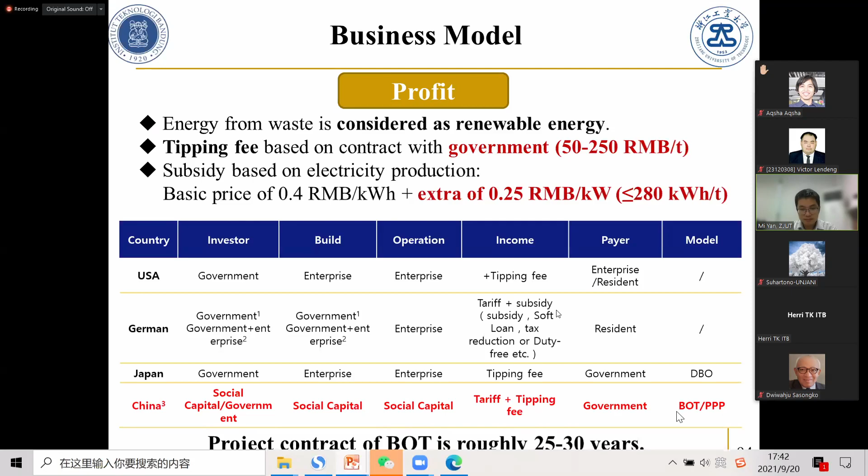So the investor, the private company, will build the WTE plant and operate it. Of course, they get the benefit. But after 30 years, the plant belongs to the government. So this is called BOT. We have many policies for electricity and for taxes. The tax is lower, even free, to support WTE development.

The last thing I want to share is the challenges for WTE sustainable development. We still face many challenges for sustainable development of WTE in China. I will share some key ones. Of course, you can get the details from 2 papers. One is by me, challenges for sustainable development of waste to energy in different countries, published in Waste Management and Research.

And another is an online book. The title is here. They include China and some other countries, and all talk about the challenges. Today I just share some key ones, such as legislation, regulation, technical standards. I think there is still an empty space or gap, so we need to set them.

We need to know how to develop business models. There are different models, right? So how to ensure the investment can get a reasonable benefit. And of course, technical localization and development. What does it mean? You cannot only depend on imported technology.

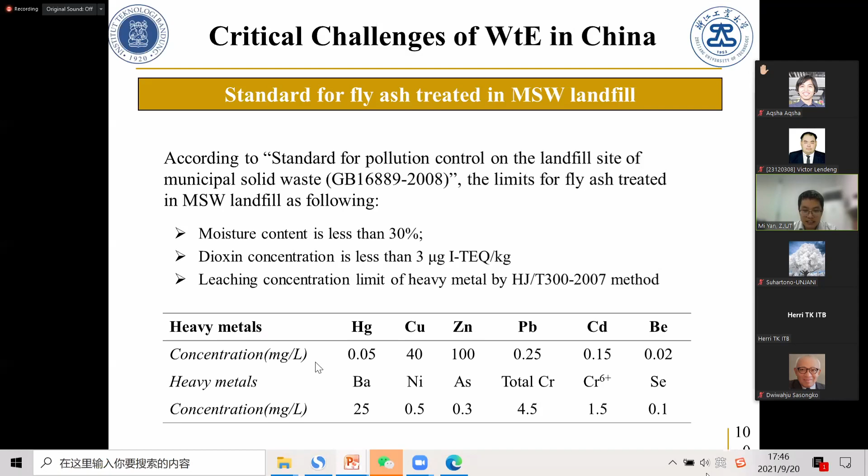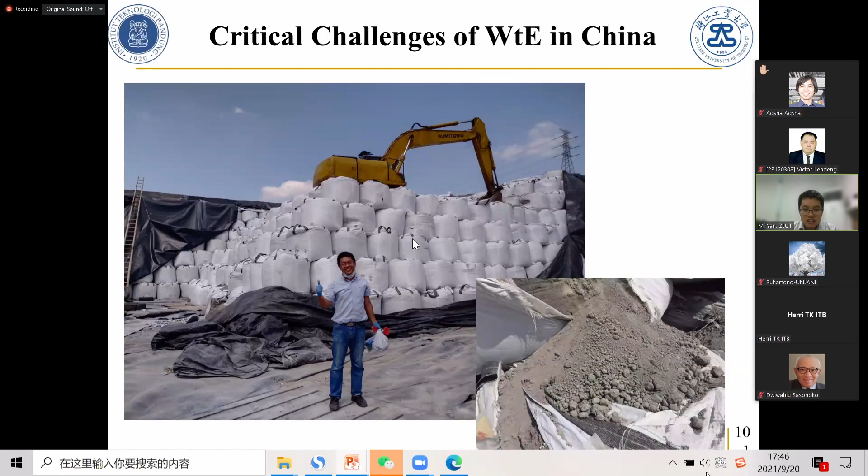Another simple way to understand why fly ash is hazardous waste: this is fly ash. If I wash and evaporate it, I will get this. Soluble salt, roughly 30 to 40% of the fly ash is salt. So it's a danger or risk for the environment. China now pays close attention to fly ash treatment, but the technology is not well developed. We just set the standard now. We have requirements for soluble salt in the fly ash, less than 10%, 2% for different usages.

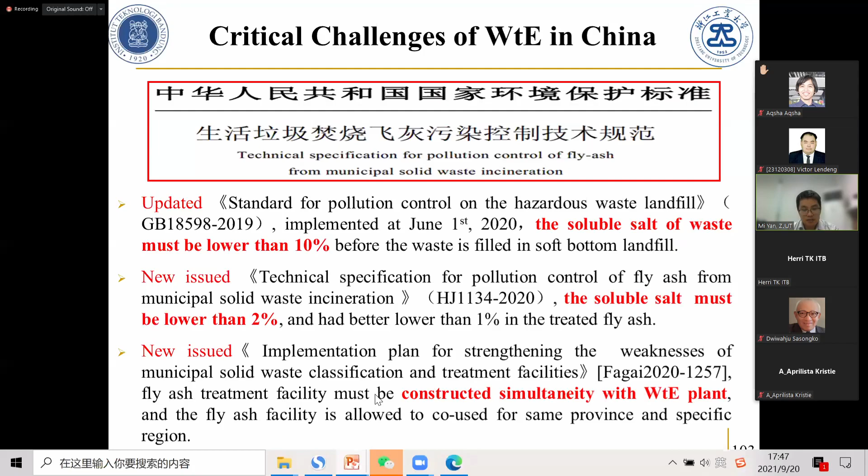And when you construct the WTE plant, you have to build the fly ash treatment facility at the same time. So now we have developed the technology to treat fly ash in a cement kiln. This fly ash is input here, at high temperature, 1,500 centigrade. That will make it stable, then it becomes cement. So fly ash is input to the cement plant and becomes cement. But the ratio is low.

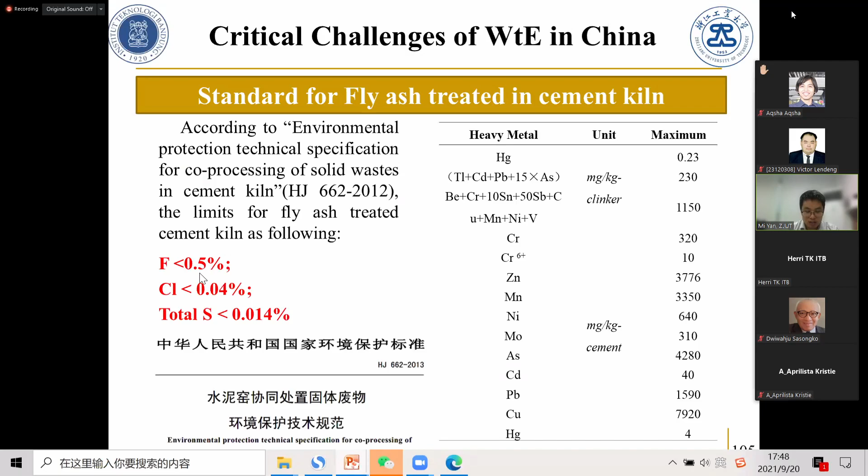And another thing is before you input your fly ash into the cement plant, you have to wash it to reduce the elements, especially F and Cl. So that means you have to wash, and washing produces this, the salt. Unfortunately, I did not take the whole picture. I visited some plants where the whole building is salt. Now we don't know how to use it, we just store it as hazardous waste. So how to deal with the salt? I will introduce some technology in the pollution control literature. Our students are doing research on this.

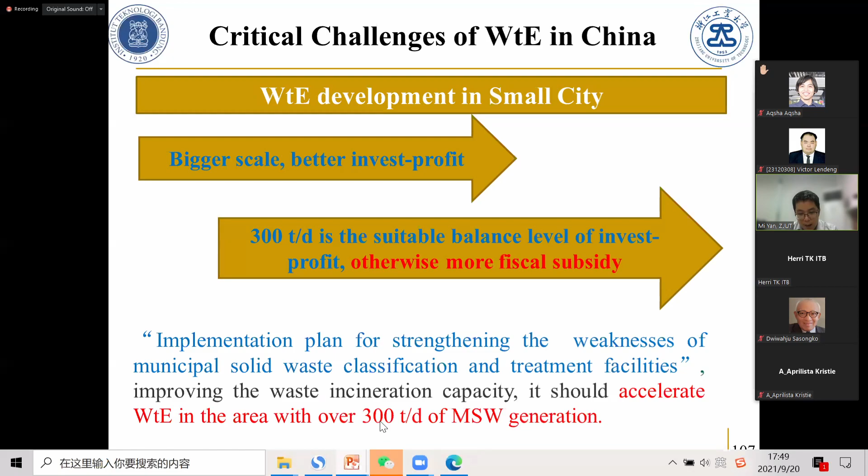Another challenge is WTE development in small cities. Bigger scale is usually better for investors, right? But in our experience, 300 tons per day is the suitable balance level for investment profits. Otherwise, it needs more government or fiscal subsidy. So usually the government sets the limit at 300 tons per day of MSW generation. What does 300 tons per day mean? If one person produces 1 kilogram a day, 300 tons per day means we need 300,000 citizens in a city. But I think many cities are smaller than this, right?

So how to develop WTE in small cities? Co-construction. What does co-construction mean? It means neighborhood A and neighborhood B, two cities, build one plant. But the problem is, construct it in which city? City A or city B? Maybe if city B's waste is transferred to city A, the citizens will protest. So co-construction technology is no problem. It's not a technical problem. It is a political problem, a public protest problem.

And co-incineration. What does co-incineration mean? It means we not only burn MSW, we also burn sludge together. We also burn industrial waste. We also burn biomass waste. But this is a new issue for the technology, and for the business model.

Another challenge is heating value variation. What does it mean? Over the years, the heat value will change. That means 10 years ago, your design was 1,500 kcal per kilogram, but 5 years later, 10 years later, your heat value has increased, right? You have to modify your incinerator.

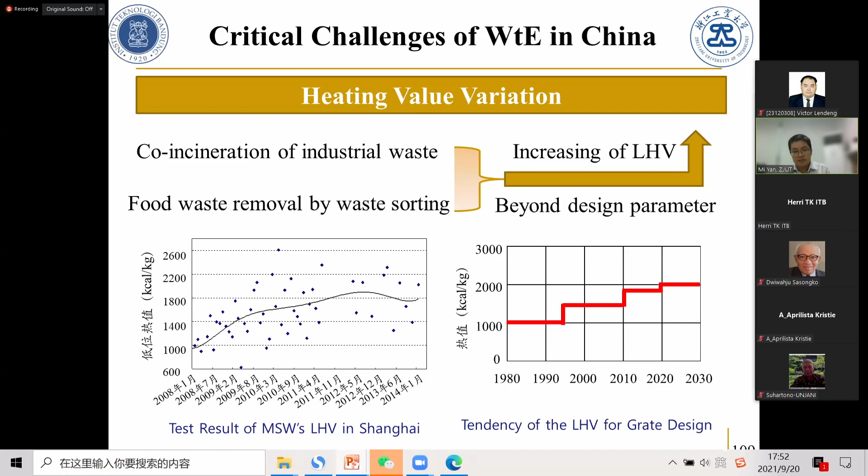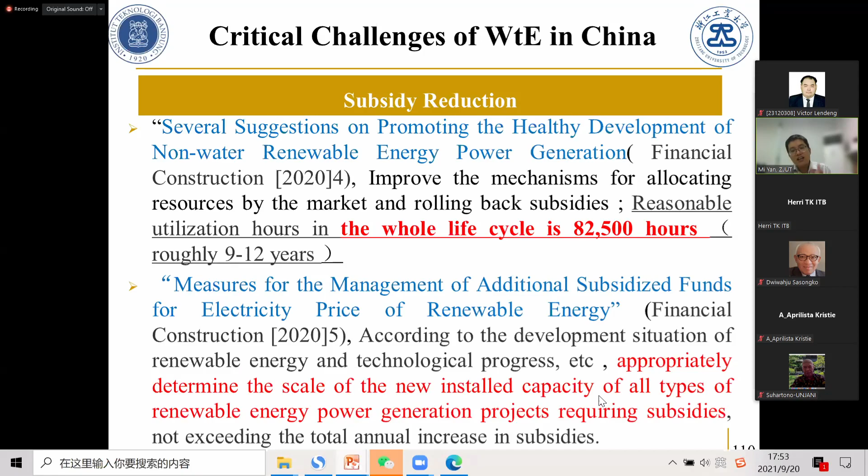The last one is the subsidy reductions. The government since last year started to reduce the subsidy. The government only pays the subsidy for 82,500 hours for one plant. That means only 9 to 12 years you can get the subsidy. After 12 years, the government doesn't pay subsidy because they think you already returned your investment and earned money. Also, not all waste-to-energy plants can get the subsidy, so there are competitions. Anyway, the subsidy will start to decrease in China.

Why does the government want to reduce the subsidy? It doesn't mean the government doesn't have enough money to pay. Actually, their logic is like this: tipping fee decrease pushes technology development. If your tipping fee decreases, the company has to think how to increase their income from electricity sales and production. So they have to think about producing more electricity to increase efficiency, which means they will develop the technology. High efficiency needs high technology equipment, high pressure and temperature, which also ensures benefit for the industry. So the government is pushing companies to improve their technologies. That's the logic.

Last, I wanted to share some experience in waste sorting and treatment in villages. I think in Indonesia, there are still many small villages or islands. This story is from my hometown. We also have regulations for waste sorting in village areas. This is not for the city - city is city, village is village.

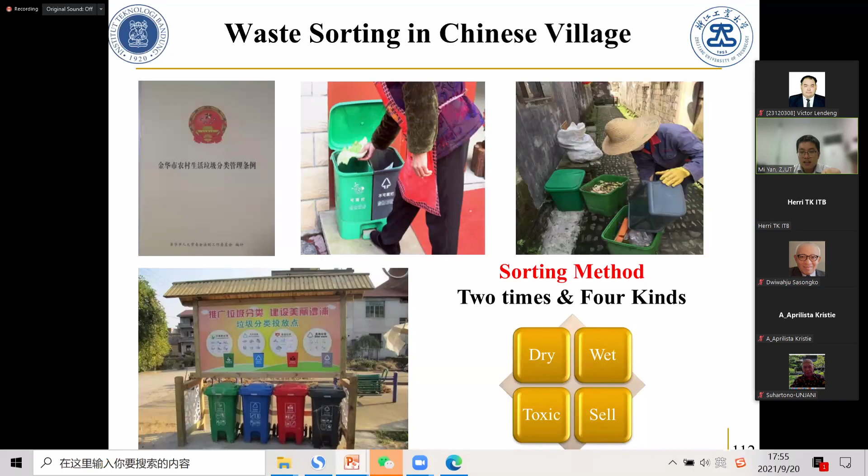Dry usually means plastic and ash. Wet usually means food waste. Toxic, of course, they understand as medicine. Sell means they can sell bottles to earn money. So we have this 2 times 4 kinds sorting method in the villages. We also use a small mini power truck divided into 4 waste bins: hazardous waste, wet, dry, and sell. And we also record the sorting scores.

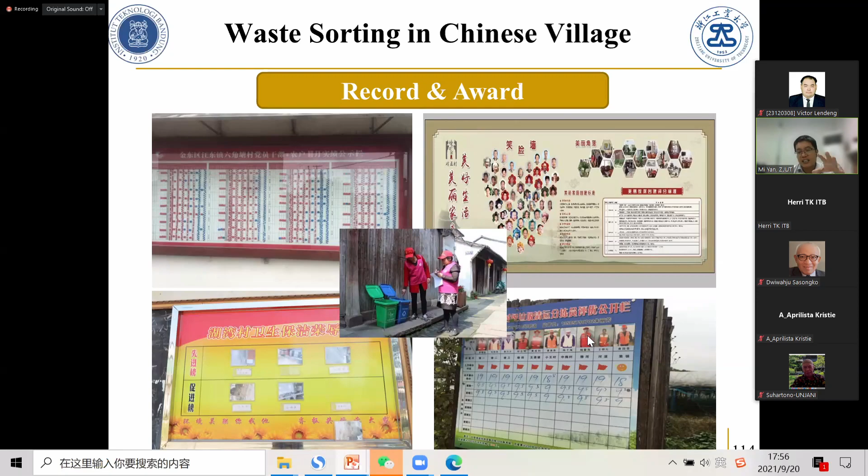Every house, if you sort well for 1 year, your family member's face will be on the wall - this is like an award, meaning you have good behavior in waste sorting. If you don't sort well, your name and picture will be on the board, meaning your home needs to improve. This is not only for household owners, but collectors also get a score, so it's like a competition.

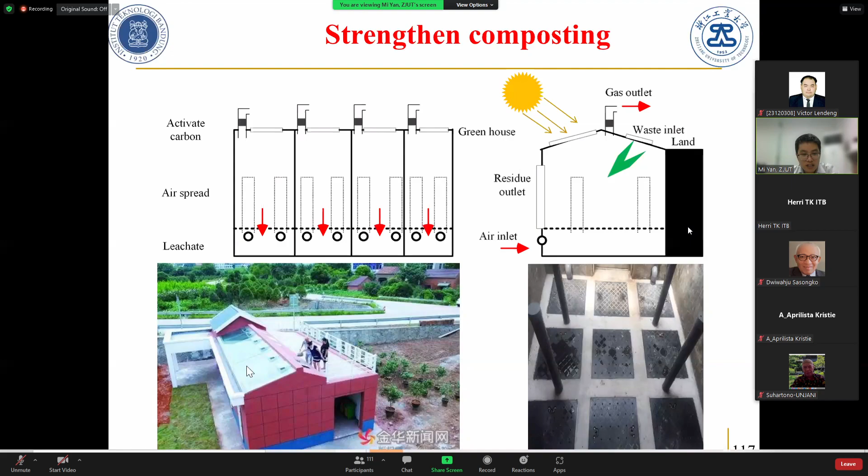The waste will be dropped from the top, and this is glass, so sunshine can come in. The air can automatically get sucked into the house, because the sun makes the room inside hot, then the air goes out, the room becomes vacuum, then refrigerated air comes in. So we don't need a machine, we don't need electricity, just drop it in. One house has 4 sets - this month, next month, the third month, like this. We can keep the compost here 1 or 2 months. This is inside where village people drop their waste, and this is glass - sunshine will heat the waste and promote the fermentation.